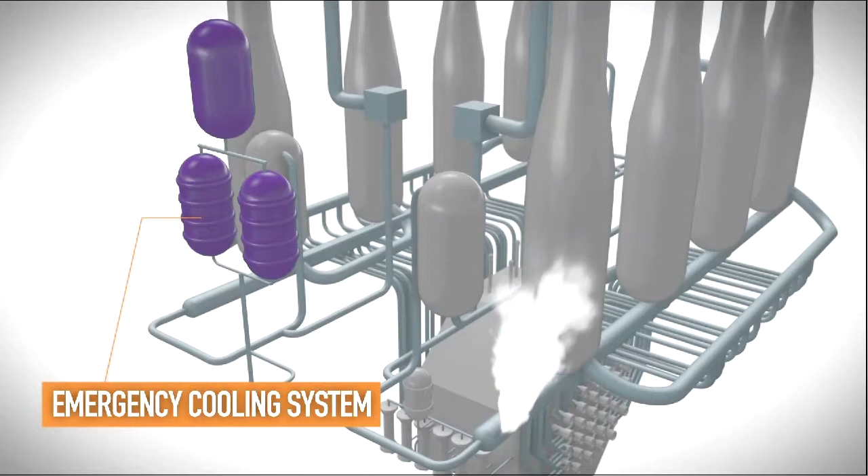The reactors themselves are enclosed by large concrete vaults that contain heat and radiation. The vaults are connected to a large vacuum building that is designed to relieve pressure and provide additional containment and cooling.

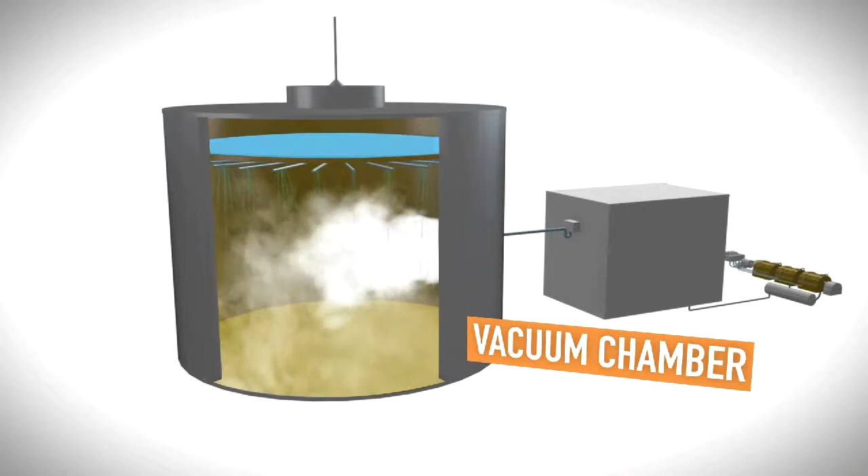So this is the way that plants have been designed traditionally, and they've been very safe over the years. But Fukushima brought upon a new concept in that the plants were self-contained. They had many levels of redundancy and backup power and so forth. Fukushima demonstrated that perhaps in some circumstances a situation could arise which would actually disable all of that because it's all in one place. And the event at Fukushima was a very significant event, not likely to happen on a very high frequency, but still some level of plausibility.

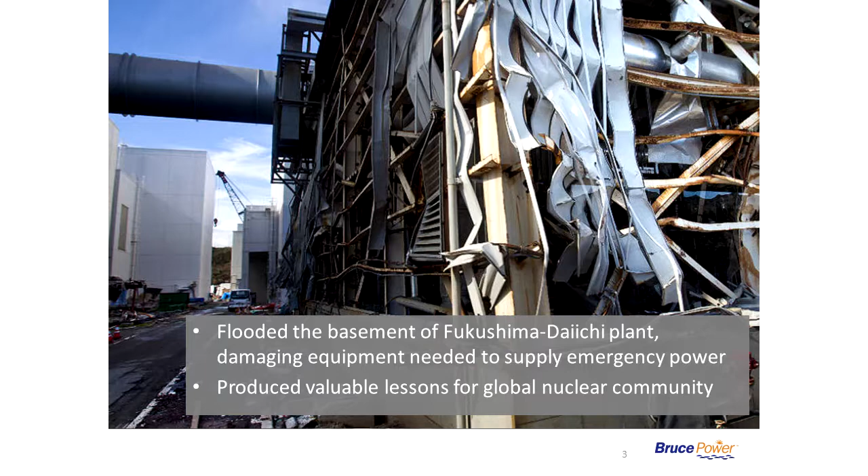So we looked at an enhanced emergency response approach that would allow us to provide an even broader level of diversity into our protective systems. We wanted to add some additional layers of defense, primarily aiming at the two things that a nuclear facility needs most of all, which is backup power and cooling water.

So emergency makeup water, we looked at in a number of different places. This just illustrates the changes we've been making and what they look like.

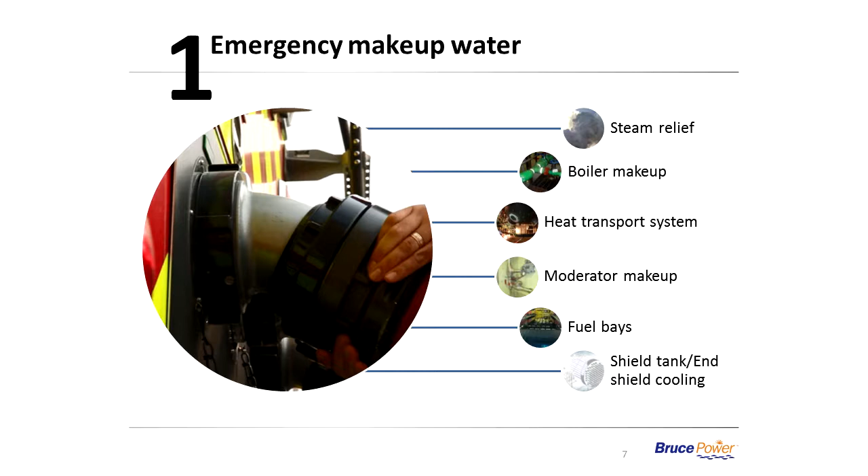If you look at the model of the reactor, which I have next, you'll see the reactor itself in the center, with the darker color representing the hot fluid from the reactor circulating through the steam generators on top. In our reactors there are 4 steam generators on each side, so a total of 8 per unit. That hot water from the reactor boils the water in the steam generator and produces steam.

In normal operating mode, that's the way it works. If you should lose a heat sink through the turbine, then the large relief valves on the top will lift in order to relieve the steam to atmosphere and cool and depressurize the heat transport system. In an emergency situation, this is exactly what you want to happen.

You don't require any pumps. The heat transport system will circulate naturally: cool water up at the top and the reactor at the bottom, and it'll cool, and the fluid will circulate with no pumps and no power.

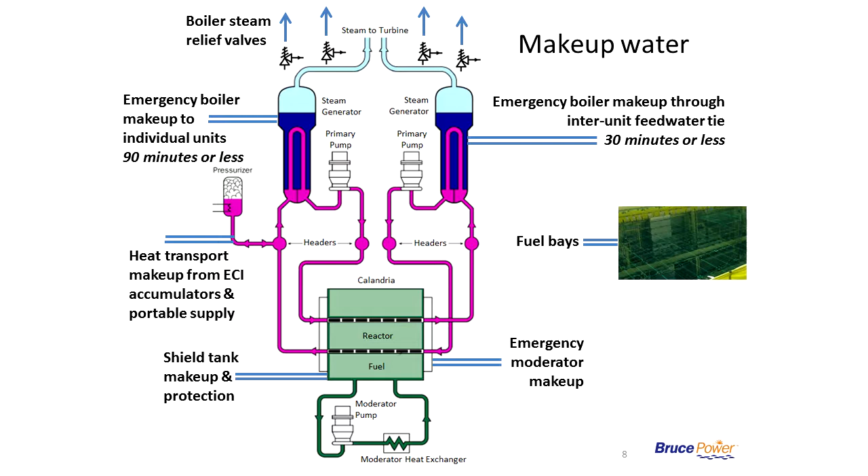To make this happen, you need a few things to be done, though. Number one, you need the boiler steam valves to be open so that there's somewhere for the water to go, so it steams off as steam. Now, there are different ways you can do this in the plant already. What we did was add another manual way of doing this through independent air tanks, so that we're sure we can open these valves and lock them open.

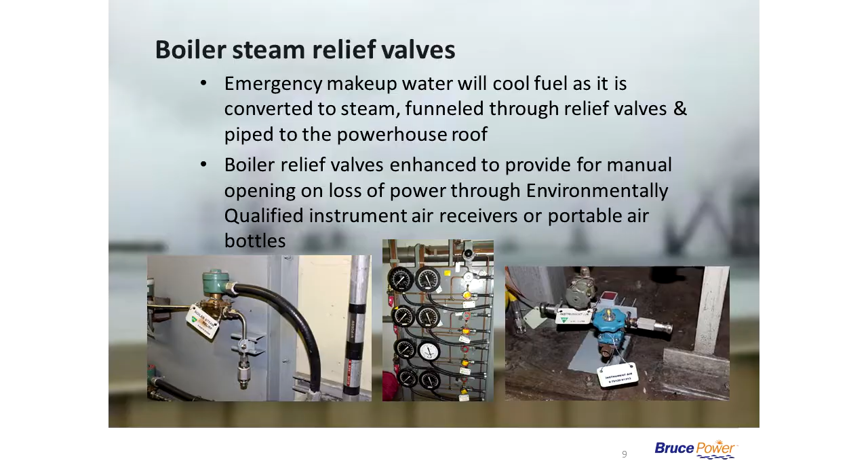Second thing you need is water in the steam generators. So the first path to water in the steam generators, through the inter-unit feedwater tie, is in place. It takes 30 minutes or less to hook this up for all 8 units, and that provides makeup water to the steam generators.

Not being satisfied with one, we have a second way of making up water to the steam generators, which can be done through each individual unit. That takes about 90 minutes to hook up to all 8 units. And the time frame we have here is about 6 hours or so to do this properly.

The next thing we need to do is make sure the heat transport system stays full of water. Obviously, in order for it to circulate and cool, it needs to be full. When you bring a reactor down from power and the heat transport fluid cools, it shrinks, and you have to add makeup water to keep it full.

The two Bruce reactor designs actually have a very unique feature, not seen on many reactors. We have what we call the heat transport accumulators. They're large tanks with a large amount of water stored in them, about 625,000 liters or so, pressurized by nitrogen, requiring no pumps. They're sitting on the system and will supply water to the reactor automatically when needed, and there's more than ample supply to keep the heat transport system full.

There are two gate valves which need to open in each unit. Those are supplied from all the emergency power sources on site, but we've also provided a hookup to the portable generators to open these valves. They can also be opened manually. So there are multiple ways we can make sure we get the feed water in.

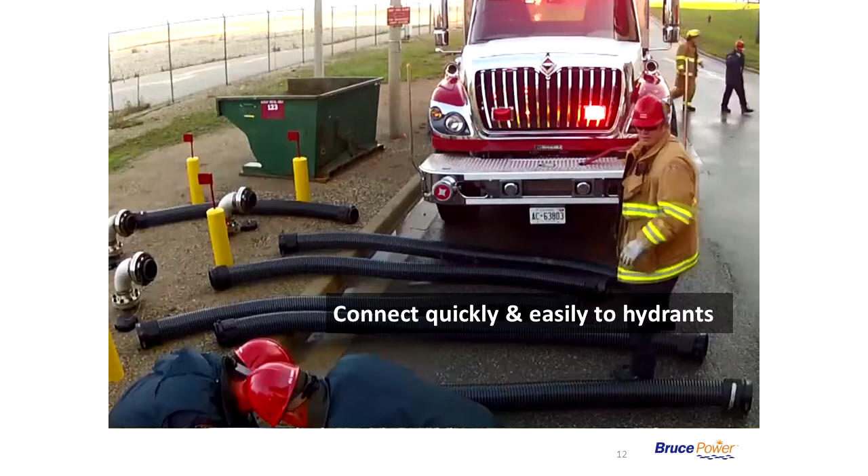These are the dry hydrants I talked about. They're actually just a pipe that drops down into the channel that flows out into the lake. This operates at lake level, so you're essentially drawing on the lake here. You hook them up to the suction side of the truck, quick and easy, and now you're ready to pump water out the other end.

This shows you how the connection point works from the truck. Connect on there, and another quick connect in the station to the inter-unit feedwater tie, and you're now ready to supply water to all the boilers in either station. That's the 30-minute hookup, that particular version.

Here's a few pictures now looking at the individual unit hookups. Remember I told you there are 2 ways — one I just showed you at the inter-unit feedwater tie. This is in the units, so there are some pictures here of how that happens. Again, you see the quick connects that are here — you just hook up to them and you can supply water.

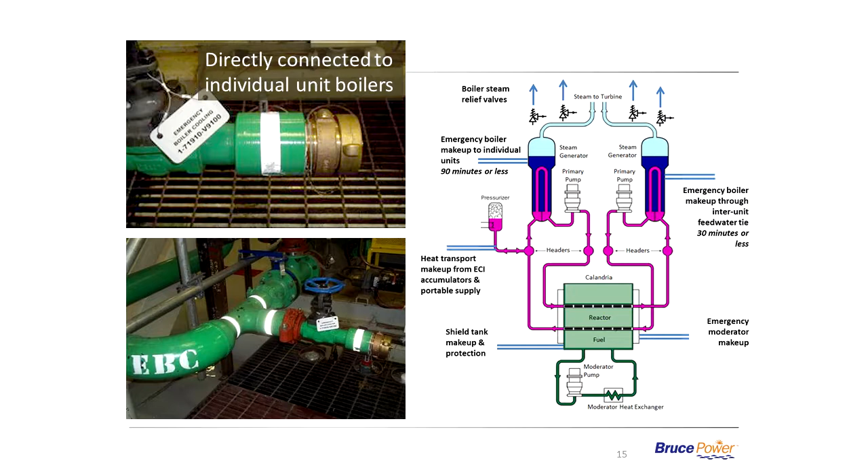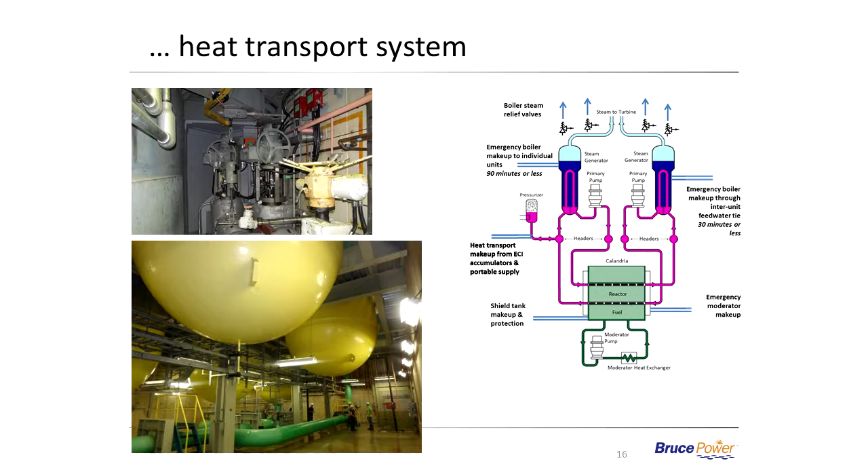This just shows you a picture of how it works. This is the moderator makeup, quick disconnects over at Bruce A on units 1 and 2, and these will be added to the remaining 6 units as well. The moderator makeup and the heat transport makeup to the quick disconnects, that begins happening with unit outages in 2016 - 3 of them in 2016, 3 in 2017, and the last 2 in 2018. That'll be the moderator and the heat transport makeup connections.

Meanwhile, we do have the SAMG process that we can use to hook up manually. The quick connects are meant to be physically diverse, provide a second way of doing it that's different from the first way, and provide a faster way. Although in truth, in the analysis, the moderator does not need to be done in a short period of time. You have time on the moderator system.

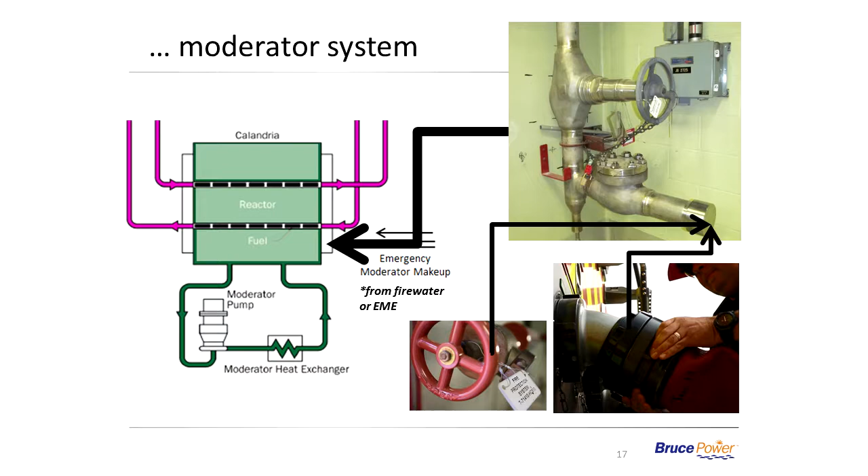Our program for the Fukushima event, really a simple concept. We're taking everyday pieces of emergency response equipment, such as fire trucks, and we've trained our staff to be able to deploy them in an unconventional method. So really, instead of fighting fire, we're making connections that are hard piping onto the stations themselves to provide cooling in a very timely fashion, to be able to ensure that the reactor cores remain cool and the fuel bays remain covered with water.

Talk a little bit about emergency power. Again, all the philosophy here is with quick, simple connections with material and equipment that the staff are used to using.

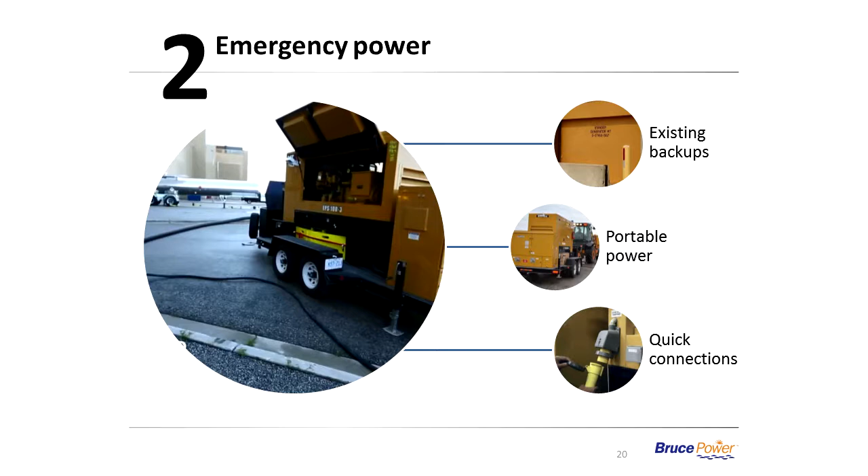So the first thing we should point out is we have a fair amount of redundancy in backup power. We have 4 standby generators and 2 emergency power generators at each station. Although the emergency power generators are called qualified power supply at Bruce A - different name, but same system. We have existing standby generators and emergency power generators that are part of the plant design.

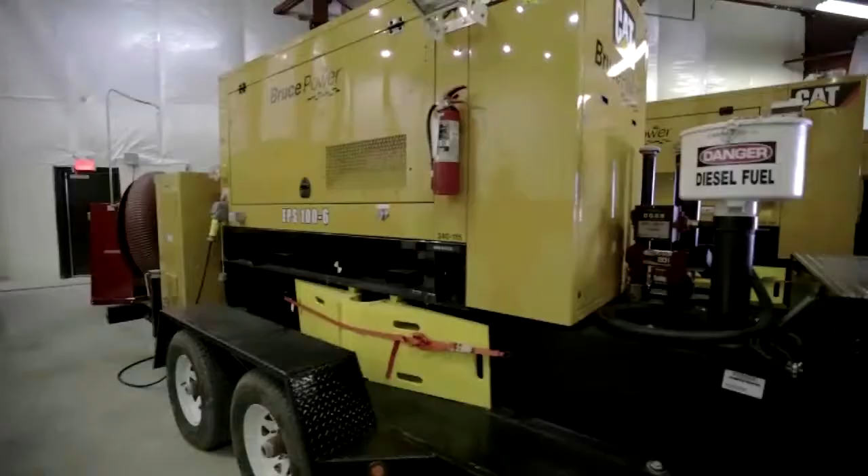There are also other backup power systems. We have diesel generators that back up our class 3, and then we have other diesel generators that back up our qualified power supply. We realized that if we lost all of our fuel tanks, we needed another backup. They're in place to make sure that if we have a loss of class 4 power or other power losses, that power still gets to the critical parts of the plant.

So you see here a few of the tractors and other things in our storage building that we use for this equipment.

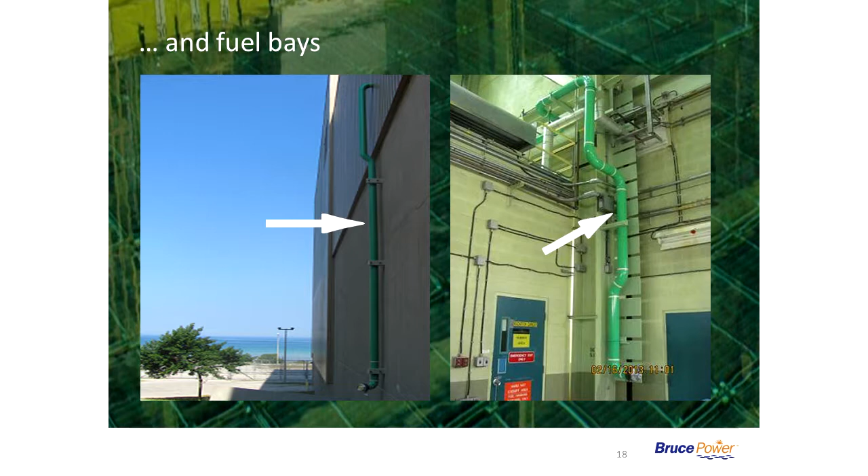So a few pictures to show you. This is the Bruce B side, the 100 kilowatt generator plus the hookup. This is one of the units - I'm not sure which one, I can't quite read the sign. These are all marked inside the station so you can't misread them, and the doors leading in from the outside are marked to lead the teams in the right door to do this so that they don't have to fumble around in an emergency.

Again, these are the 100 kilowatt generators. There's a redundant generator there. There's only 6 required, and we have an extra.

This is them being deployed. I think this was actually Huron Challenge.

This is at Bruce A side. The electrical system at Bruce A is a little different design, so we have a 400 kilowatt generator there, and this is it hooked up over at Bruce A.

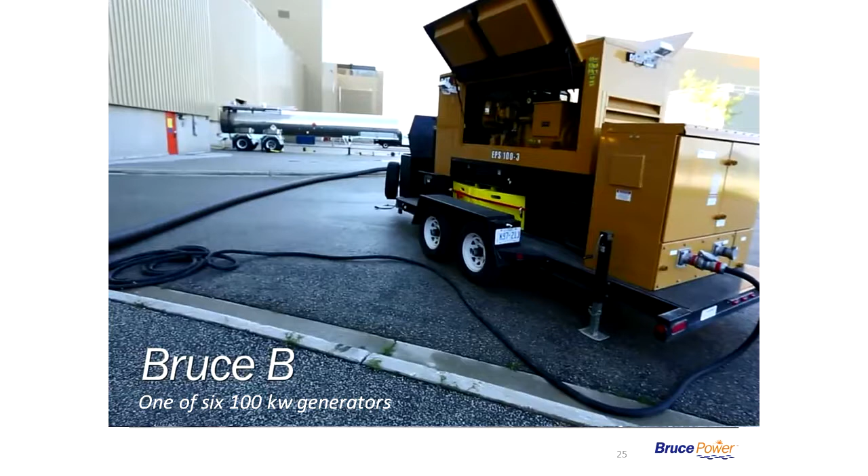This is back at Bruce B with one of them again. The quick connects from the generator itself, pretty straightforward. On the left here you see the Bruce A connection, and on the right you see the Bruce B connection. They're slightly different systems, so they had to have a slightly different hookup, but that was done on purpose.

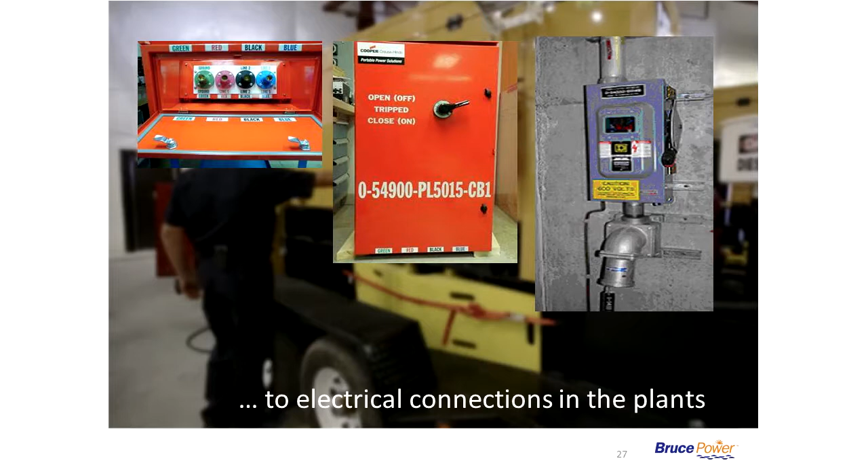The other thing, of course, is this was a lot of new equipment and new operating skills that hadn't existed exactly before. So we needed to do the task analysis, develop the training, and take people through the qualifications, inventing some new qualifications to do that, and that's been done. We're still looking at the systematic approach to training on the broader ERO skills, the guys in the emergency management centers and the like, and there's still some work ongoing. But all the emergency response personnel have been through this training and done it many times now.

We haven't forgotten about one of the key risks. There's some danger sometimes when you get looking at the exotic risks, the tornadoes and the big events, that you forget about the day-to-day things that are problematic. The one that's probably the biggest risk for us, and I think the biggest risk for any building or any house, is actually fire. So we haven't forgotten about that. We've been doing a lot of work on this as well, both because it's a risk day to day, and of course in a catastrophe when things go wrong and tornadoes go through, sometimes things catch fire.

So we've done a fair amount of work in this regard. In fact, we were just this morning doing the grand opening of the fire training facility, and these are a couple of the pictures. This isn't really the plant that's burning here—these are mock-ups in the fire training facility. It's a 5-story building, and as you can see, a nice big turbine generator set that people take quite joy in lighting on fire. This is a cable tray, a very standard thing in the plant, and here's a heat transport pump. So you get an idea—we have 11 design basis fires in the plant, and they're all represented here, along with a number of external fires like vehicles and other things we might have to fight, as well as some pans we can use to train on foam as well.

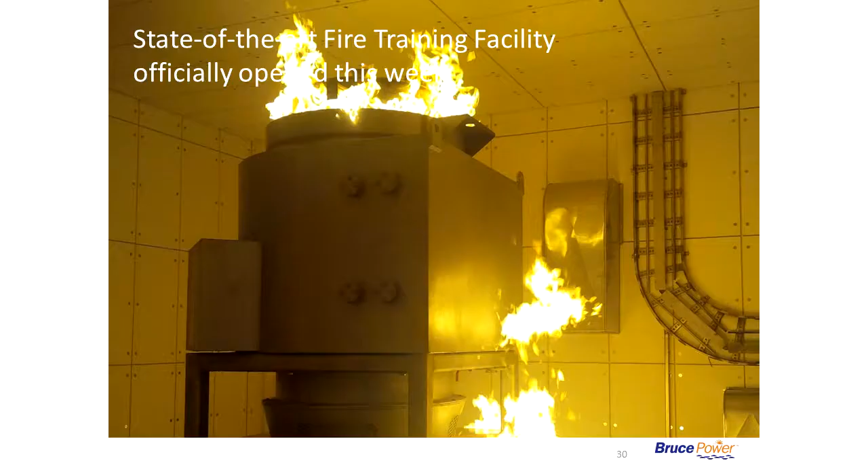So having all the equipment is great, and making sure we know how to use it is great. We also need to know how to work together and coordinate the activity. Huron Challenge was a big exercise in that regard to test it out, and next year we will do another major exercise to work through this.

I've got a couple of little clips here from Huron Challenge, I think, which...

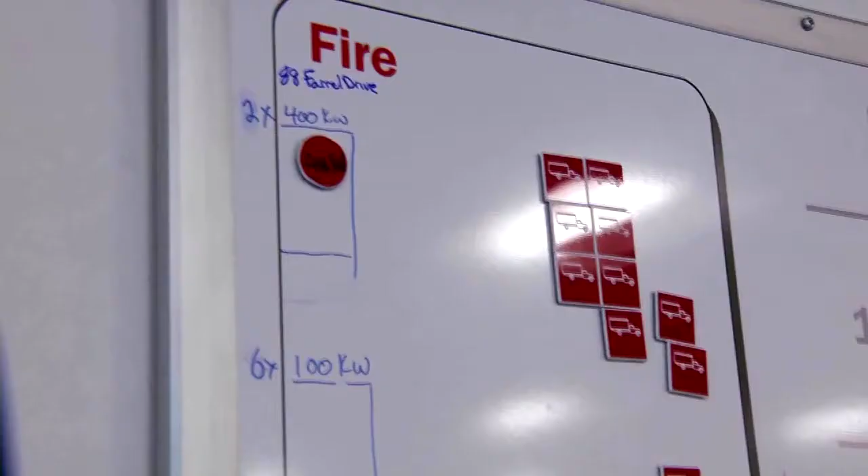This is Drill Ops Chief. Emergency Services is presently en route with the required equipment to B. They are clearing the route to A. They have all the resources they need at this time. Clearing efforts underway to A still? Correct, and they're moving emergency support equipment from here—en route, from 88 Farrell to GSB. Correct. The first challenge is a blocked road from tornado damage en route to Bruce A.

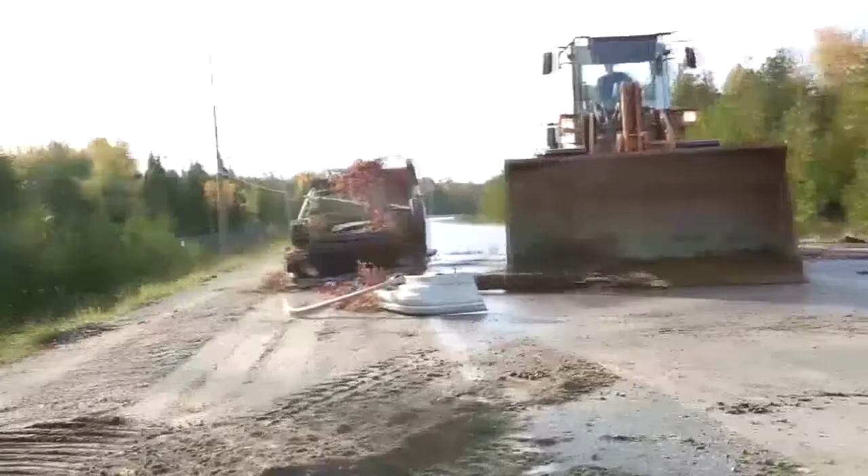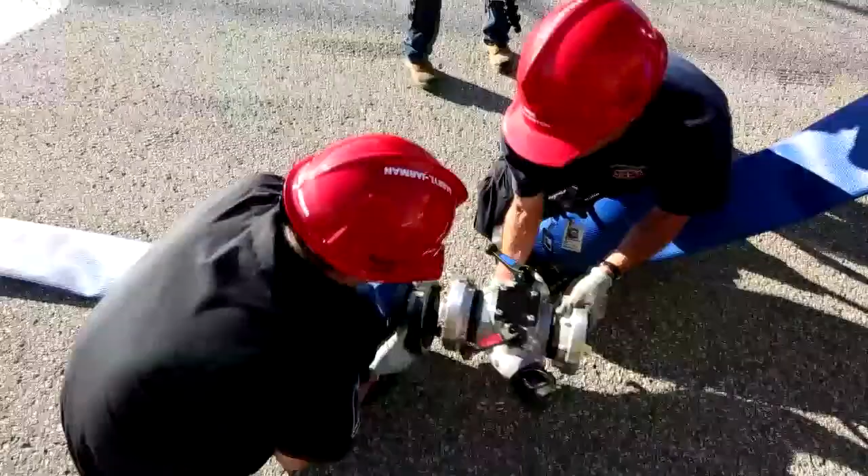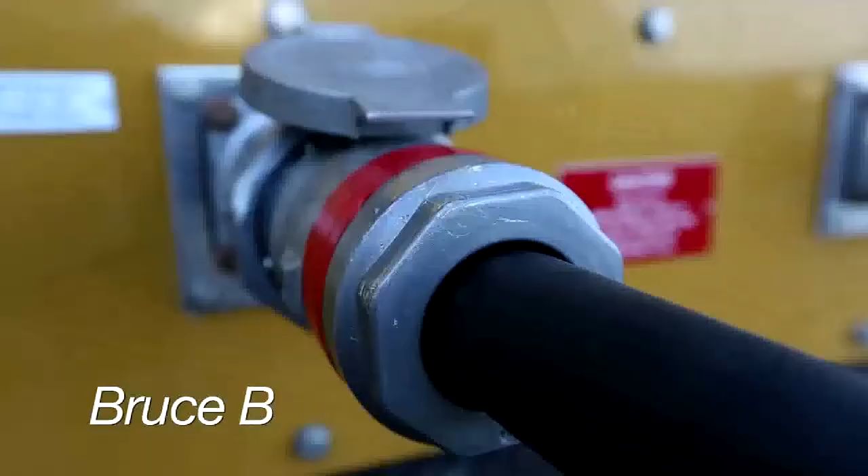Bruce Power first responders are being trained on payloaders and know how to remove debris. The payloader makes room for the fire trucks to get to the stations, which can now pass through and get to the station to cool the fuel. Arriving at Bruce A, the team must attach hose from the dry hydrants to the trucks to pull water from the lake and pump it onto the fuel. These trucks can pull up to 3,000 gallons of water per minute, more than double the ability of standard fire trucks. They must then attach hoses to the fire trucks to deliver water to the stations. A tractor and hose trailer are used to lay hundreds of feet of hose to supply each station's 4 reactors with cool water. The water provided to each reactor keeps the fuel cool, and the risk of overheating is eliminated. Simultaneously, they must carry emergency backup generators by tractor. Bruce A has one 400 kilowatt generator, and 6 100 kilowatt generators go to Bruce B. These generators run for 36 to 48 hours without having to refuel.

While the team sets up the fire trucks and generators, those working inside the plant prepare to receive the cool water and power. And of course, during Huron Challenge, the other side is what's going on out in the community and how you support that and make sure the equipment is there. These are a few pictures: Canadian Red Cross, Health Canada copter doing radiation surveys over the site, the OPP doing rescue up in Port Elgin, and some students who were happy enough to play casualty for us and test out the hospital facilities.

They seem to enjoy this sort of thing.

The Emergency Workers Center in the bottom right was set up in Kincardine but actually moved to Port Elgin in the middle of the drill to test out its ability to do that. The field hospital was set up in the parking lot of the Southampton Hospital as part of the drill, along with one of the houses that was destroyed in Port Elgin as part of the overall scenario.

In truth, they actually destroyed this house. It was one that was being taken down, so it was a real demolition. They mounted a considerable rescue to get people out of the house who were trapped in it. It worked out, and it was fortunate that the developer was willing to let us use his prop in the exercise. To do that, we had to set up a fairly large control area, so we did that in our large auditorium on site, just to control and send the messages out.

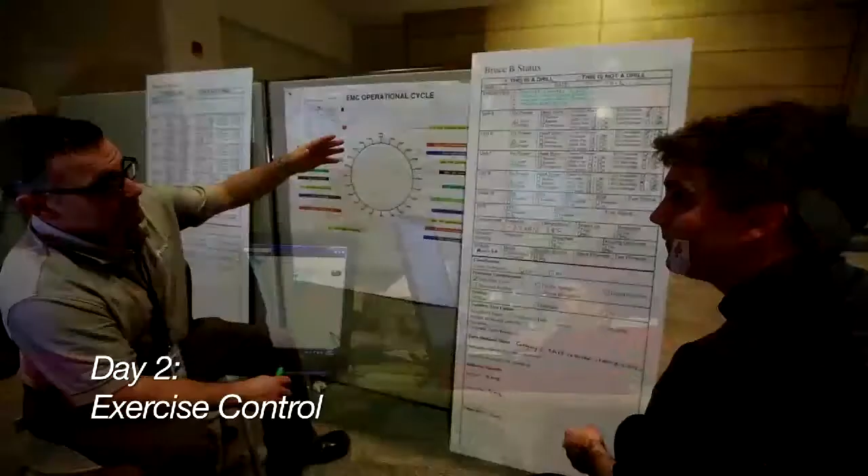Also at the Bruce Power site, Exercise Control, or XCON, continued to set up challenges for the 71 participating organizations in the 4 counties of Grey, Bruce, Huron, and Wellington. XCON is made up of staff from each participating organization and Emergency Management Ontario. These small teams of people exemplify months of planning for each exercise theme.

The teams at the various emergency operations centers react to situations called injects, provided to them by the XCON team. Huron Challenge was one of the largest emergency drills carried out in Ontario.

The last thing we needed to test was the durability of the trucks and the pumpers themselves, so we put them through a 24-hour run. Back at Bruce B, the fire trucks continue to pump water well into the night. The trucks have refueled and must continue to pump water for 24 hours to prove they are self-sufficient.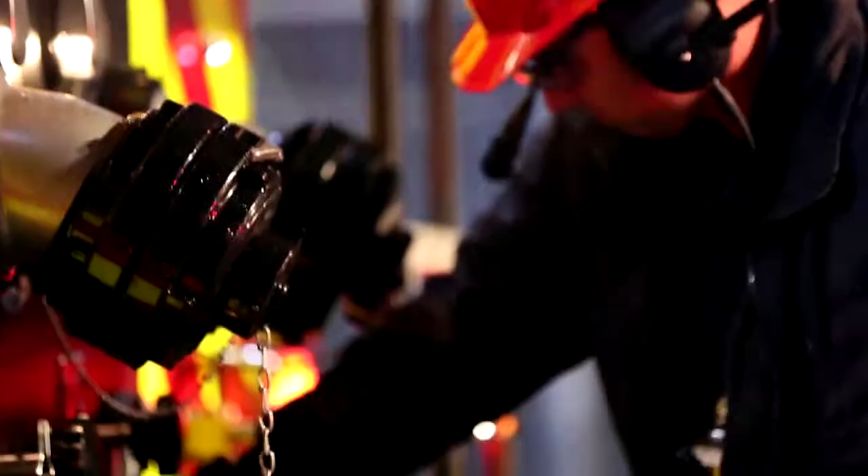Having proven self-sufficiency for over 24 hours, the following morning, the fire trucks are allowed to be shut off.

Site 1, this is Bruce B Pumpers. Confirmed successful refueling through the night. Trucks have run successful for 24 hours. Request we shut down, over.

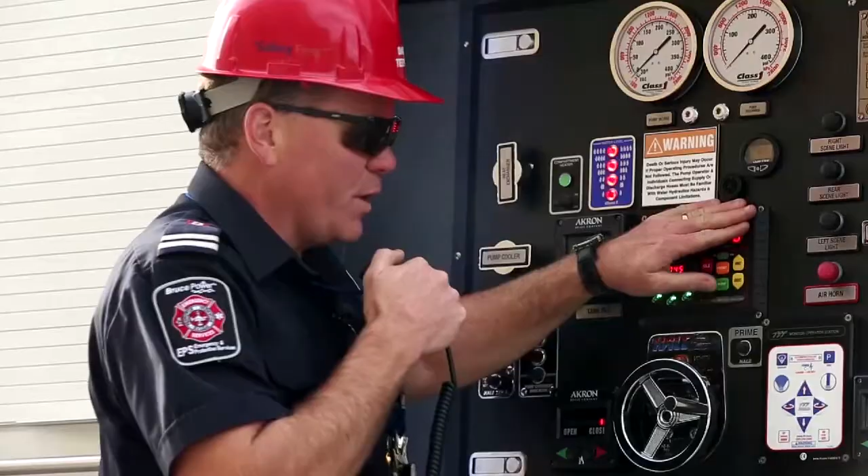We used our portable pumper to fuel those trucks while they're operating. You have to fuel them about every 5 hours when they're running full tilt like that. So the portable truck comes around, fills them up while they're running without interruption.

And of course, the next step is, what about off-site? Should the emergency get to the point where there's an off-site release, how do you deal with that?

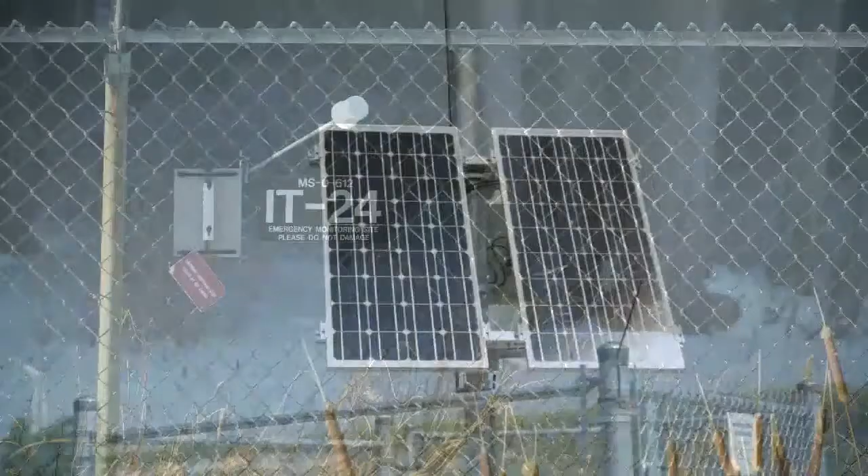We've developed a new off-site monitoring system out to 10 kilometers, which will automatically detect any radiation released. It'll operate 24/7 whether there's an event on or not. This will provide very accurate and detailed tracking of any radiation that might be released in an emergency, thereby allowing the government to easily move people out of the way.

The remote monitoring system at Bruce Power consists of 44 spectrometers or radiation detectors. The system itself is fully redundant in the sense that the detectors are battery operated and have trickle backup solar panel charge to sustain operation. The data from the detectors is sent through the cellular network, which provides us the capability to have near real-time remote monitoring around the Bruce Power site.

Where we retrieve the data from the detectors is within our emergency management center, and the emergency management center itself is also fully redundant in terms of backup power and backup communication systems. So as you see behind me, we have a remote monitor with very sensitive detectors. In fact, they're so sensitive they'll actually pick up on everyday common household items.

In terms of expanding our public notification system, we've looked at not only use of sirens, but also capabilities such as FM radio connection to the public alerting system within the province of Ontario. We have different normal or high priority messages, and I'll just type in, this is a test, so I'll hit send now, and that is sent.

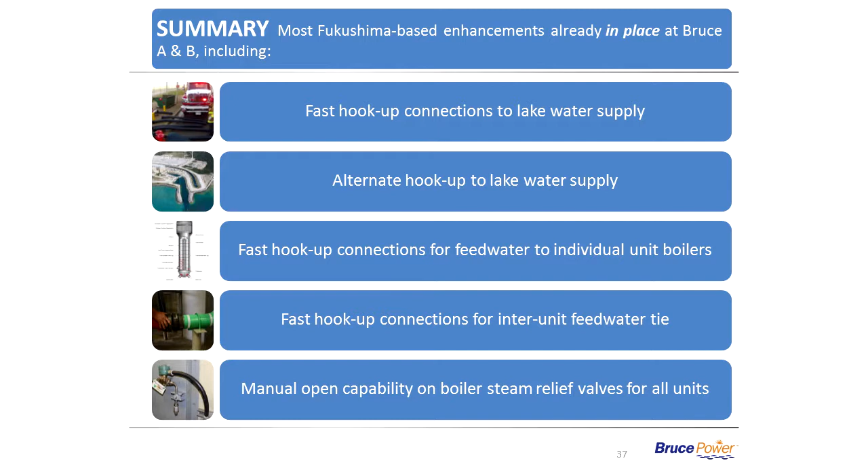Fast hook up to the lake water, alternate hook up to the lake water supply, fast hook feed water to individual and unit boilers, the inter-unit feed water tie, and manual opening on the boiler steam and relief valves on all units.

Fast hookup water connections to the primary fuel bay and to the secondary fuel bays. Fast hookup water connections to the moderator on Unit 1-2.

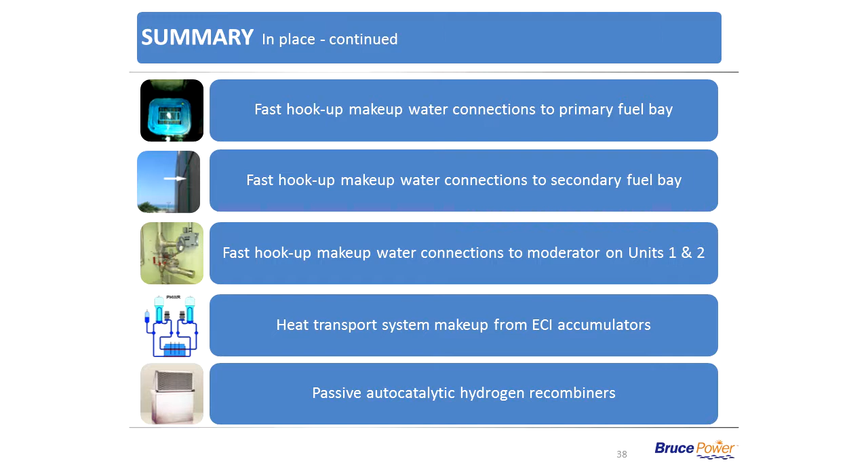Heat transport makeup from ECI accumulators and passive autocatalytic hydrogen recombiners, all done and in place. Severe accident management method to make up water to the heat transport system, and a severe accident management method to make up water to the moderator. This basically means that we manually hook it up rather than using a quick disconnect to do it.

Fast hook up electrical connections for each unit and the common systems, as well as the EFADS. Fast hook up electrical connections for containment emergency filtered air discharge system.

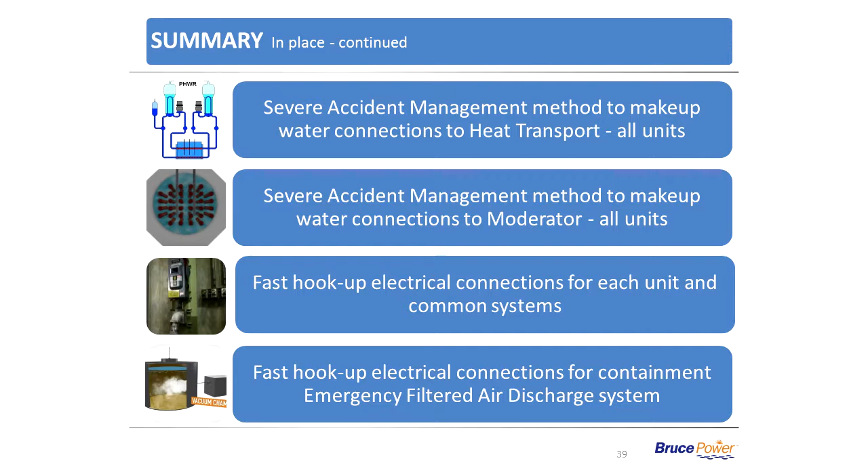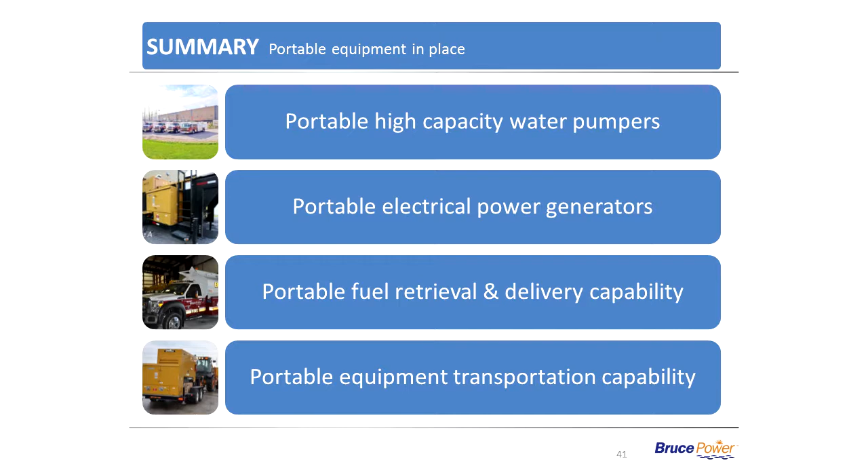Portable high capacity water pumpers, 5 of those. 12 portable power generators, portable fuel retrieval and delivery truck, portable equipment transportation capability, again all in place. Heavy duty equipment for route clearing, portable equipment storage building, firefighting equipment, and a maintenance and testing program for all that equipment, all in place as of today.

Off-site support in place. We've got a communication system that works very well, can talk to people virtually anytime. The radiation monitors out to 10 kilometers are in place, and we have deployable radiation monitors that we can deploy beyond that should we need to.

Potassium iodide tablets, we actually just started to get the delivery today. They were a little slow, so this is them in the new package, and we can let you have a look at those after a bit if you like. And this is a booklet. It's also on the Be Prepared Huron Bruce Gray website now, with all the different emergencies in it, including nuclear.

The FM alert, the radios are here, the system is ready to go. We opted to do the distribution after we do the KI pills so as not to confuse people, so we'll be doing that very shortly. And that'll actually be a fairly broad distribution because we don't see the FM alert as particularly a nuclear capability. It's a capability that the communities can use for emergencies in general. It just includes nuclear.

Safety assessments. Our chief engineer is going to talk here in a minute about the safety assessments and where we've got to, but we've included some pretty extreme external events in here. Despite that we broadened the events and broadened the requirements considerably, the addition of the EME, as you might expect, the emergency mitigating equipment as a whole new layer of defense, has made a significant improvement on the overall outcome of those PSA results.

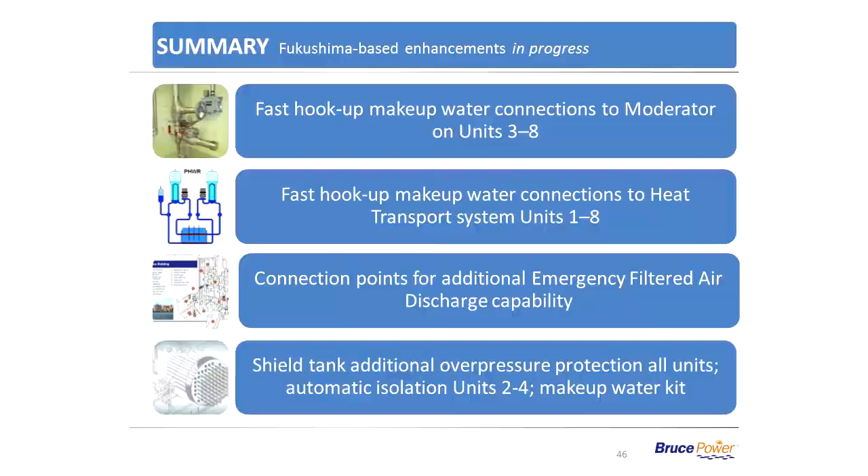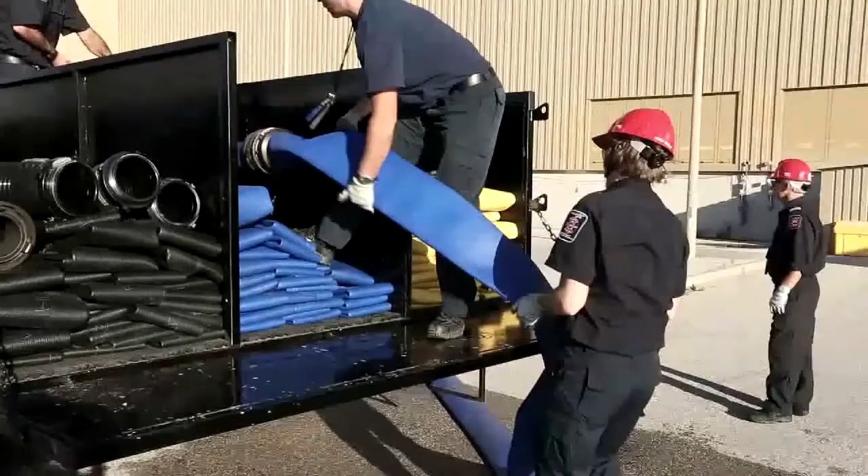We feel that we've taken the Fukushima events very seriously, applying the lessons in a much broader sense, looking not just at those kinds of events but any event that might occur. We think our crews are well trained and on standby 24/7, so we feel we have the capability to deal with virtually any emergency. We invite you to drop by our visitor center for a closer look at the plant and facilities, and I think you'll walk away with confidence that the place is well looked after and we're well prepared.

That was a little long, but I thought it important given the central place Fukushima has taken in the last few years, and the amount of effort and time put into it, to go through it in some detail and talk about what's fully in place and what's yet to be done. So that's it for that presentation. I'll now move over to Mr. Newman to talk about PSA.

Okay, thank you Frank. Good evening, for the record, Gary Newman. I'm going to be speaking this evening about assessing and understanding risk. We'll be doing so at a fairly high level—obviously we could spend a number of days discussing this topic were time available.

For the purpose of this Part 2 Commission hearing, we felt it was important to provide more detail on all the work completed to evaluate both internal and external sources of risk, which in turn demonstrates that Bruce Power is compliant with current CNSC regulations.

At a high level, I plan to speak to the following aspects: the historic perspective based upon relevant regulation, including establishing and sustaining a credible design, and improving the design through risk-informed enhancements. We'll then discuss the evolution and updates to our safety assessments, followed by a brief discussion on new tools, which Mr. Saunders has already touched on some of, the ongoing plant and response planning enhancements, also already touched on by Mr. Saunders, and then a brief summary.

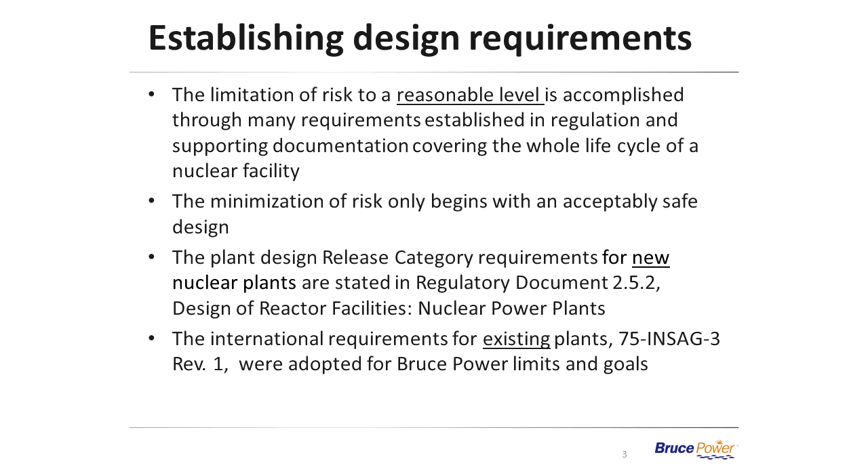The design requirements were established in the original siting guide, which identified the deterministic design and operating requirements and sets the single and dual failure dose limits.

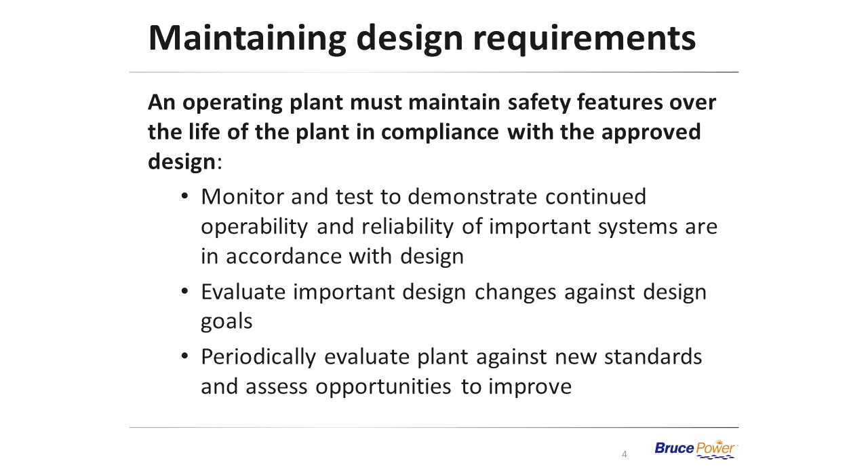From a safety report viewpoint, probabilistic assessments were added to the original deterministic tool set beginning in the 1990s. At that time, goals and limits were set for severe core damage, large and severe release, as well as public health criteria. These early PSAs embraced release thresholds approximately 5 times larger than current values, resulting in the need to produce more accurate predictions within current assessments.

These historic PSA assessments were completed after the plants were in operation for many years, rather than as part of the design activity. Modeling activities focused on comparing with the new expectations, so in general only enough work was completed to confirm that the limit was achieved. This meant that many supporting systems were not modeled but simply assumed to not be available as a result of the event, which adds considerable conservatism. These assessments focused on internal plant events, including loss of off-site power, the latter being a single external event that was considered.

As part of the safety assessment evolution, a greater focus on external events was established by CNSC Standard 294 in 2005.

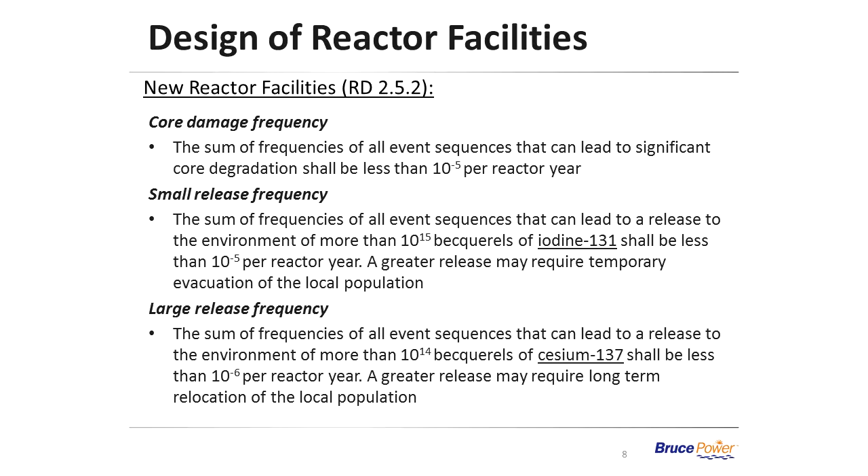These definitions were developed based on internal plant events, and there remains a discussion about how to properly integrate external and internal events and properly calculate an accurate aggregated release frequency. However, for the purposes of today's discussion, we have simply added them, although we know this is a conservative treatment.

As an example of the continuous improvement process, work has been completed to enhance the Bruce A and B safety reports through updated PSAs, which consider fire, seismic, high winds, and flooding under both operating and shutdown conditions. This was completed against the backdrop of updated PSA release categories.

The following lists the safety improvements that have been installed in the plants and were included in the internal plant event assessments. So for example, the emergency makeup water from portable equipment directly into the boilers, as already described by Mr. Saunders. I do not plan to go through the list. However, most of these improvements have been fully installed and credited within the PSAs.

Fast makeup water to the heat transport system is currently ensured by additional emergency power to the Emergency Core Injection accumulator tanks.

Another committed makeup path for emergency mitigation equipment utilizes severe accident management instructions can also be established. Installation of a third path through quick connect fittings is in progress.

Makeup water to the moderator system from emergency mitigation equipment utilizing severe accident management instructions can also be established. Installation of another path through quick connect fittings is in place for units 1 and 2 and in progress for units 3 to 8 as already described.

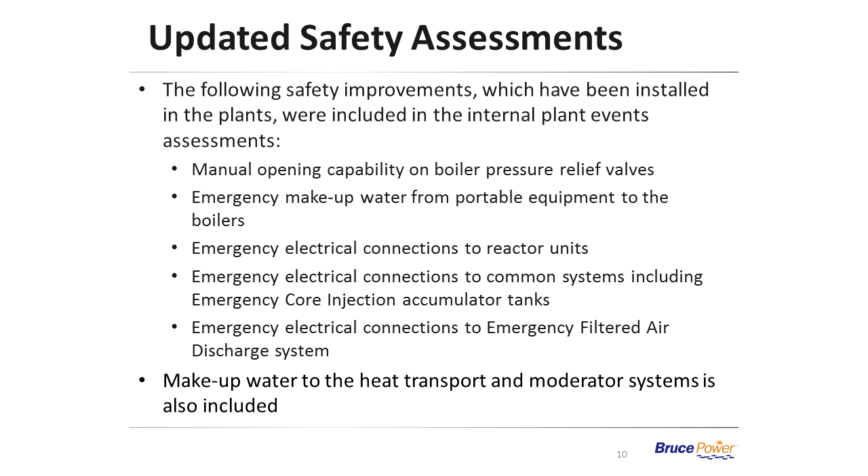I should note there was one additional bullet that may not be on your slide, and there's a makeup water to the heat transport and moderator systems, which we added afterwards.

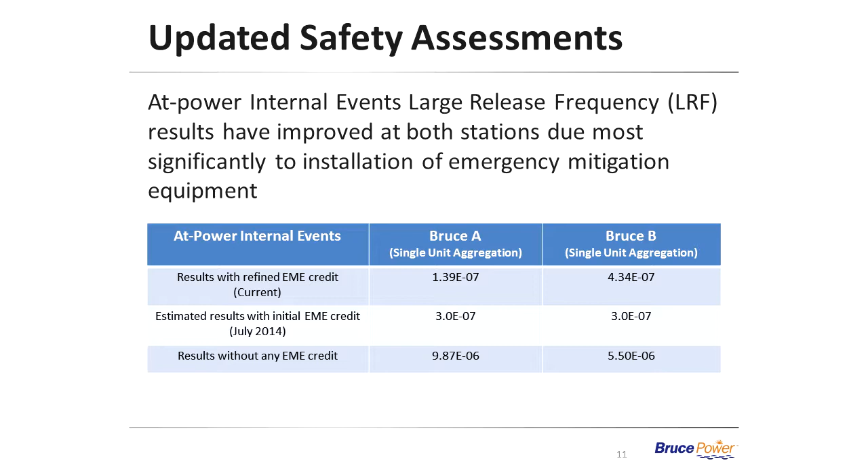Also, the estimated values for EME were provided in the July submission to the CNSC and more precisely calculated in the November license application update. The estimates proved to be pretty accurate.

Some safety improvements that were committed and currently in progress, as already described by Mr. Saunders, are credited in the station aggregation for large release frequencies and external events, for example, enhancements to containment robustness for multi-unit events. Although still a very conservative calculation, it demonstrates the progress made through the Fukushima enhancements and the value of the work still in progress.

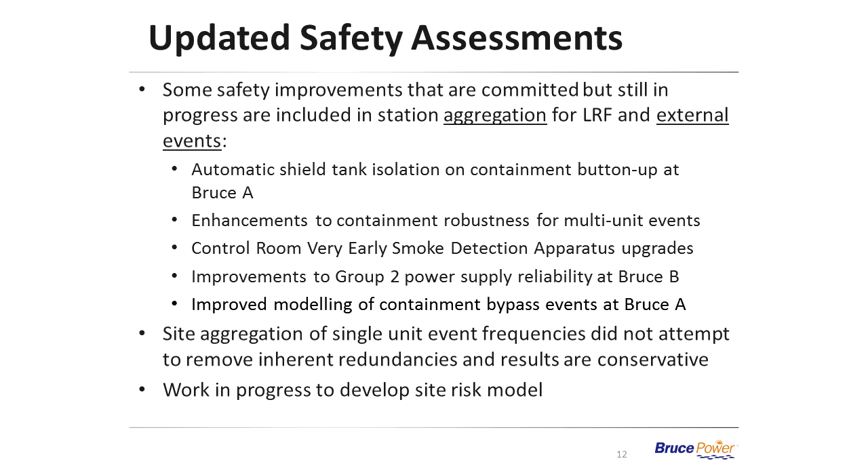It is also important to note that site aggregation of single unit event frequencies did not attempt to remove the inherent redundancies, and results are considered to be conservative. Lastly, industry-driven further work is underway to develop a site-based risk model, which we believe is currently leading the industry in this area of development.

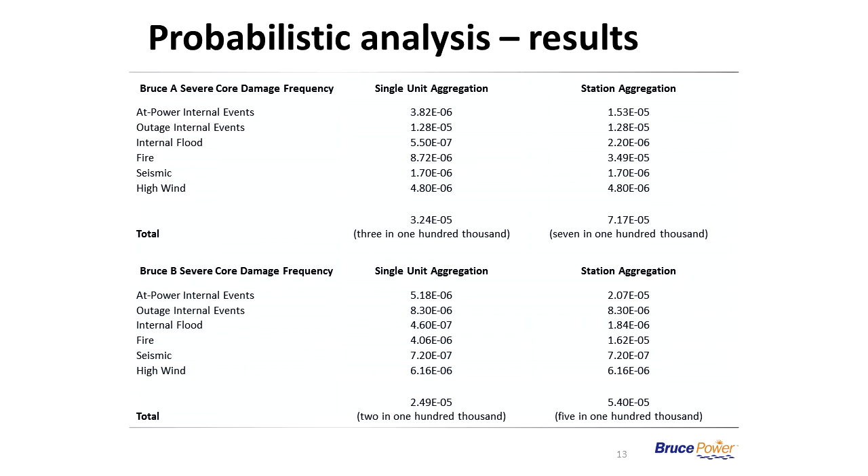On the next slide, we have results for the severe core damage. This table provides results for each station, for the combination of internal and external events, for single unit aggregation results in column 2, as well as station aggregate results in column 3. All of these results meet the requirements of the current criteria.

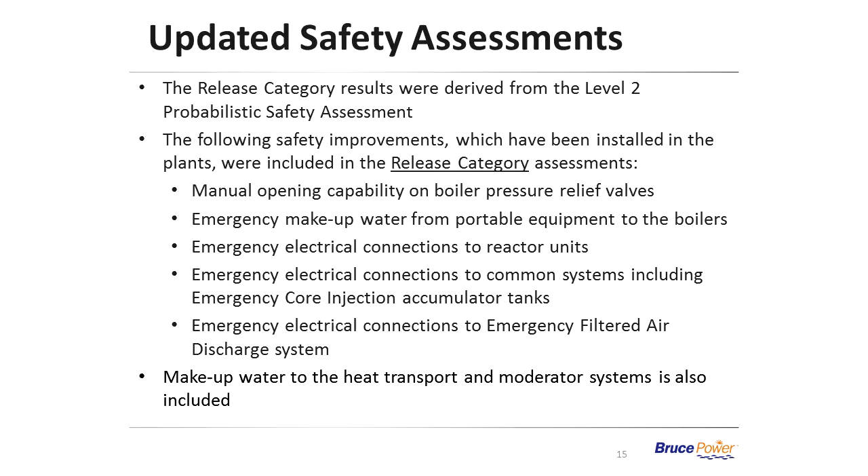Just as I described for the severe core damage frequency calculations, we have similarly credited installed EME for release category assessments, and you can see examples of the noted improvements in the following table. For example, the design basis events at both stations, one can see the frequency improvement when crediting EME, comparing the third and fourth columns. These release frequencies, while still very unlikely, are the most probable.

The releases would occur as a result of venting of containment through the emergency filtered air discharge system. This type of venting maintains containment pressure low and prevents release of isotopes that can result in longer-term contamination. These are the type of events where shelter in place may be a viable option, and as Mr. Saunders has indicated, the use of potassium iodide may be directed.

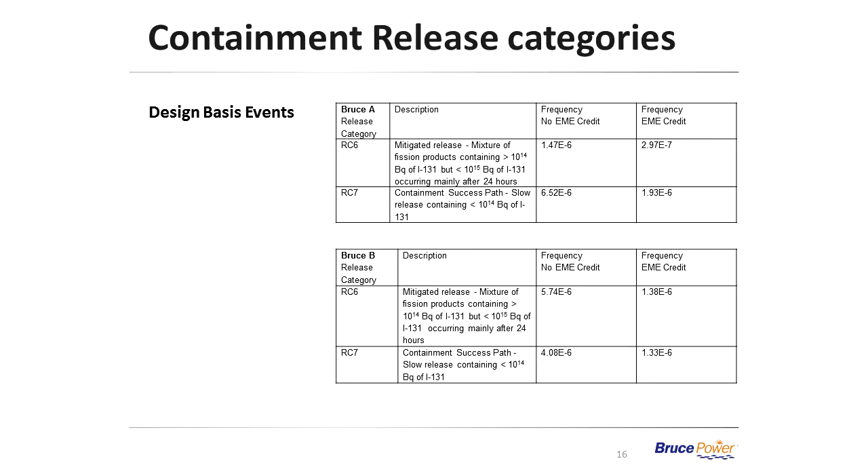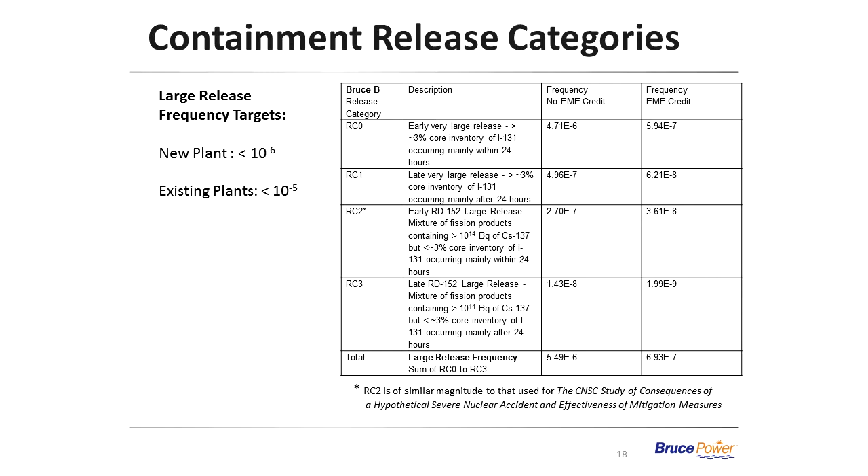And on the next slide, the same again for Bruce B. Decrease in frequency when EME is credited, well below the 10 to the minus 6 cutoff, normally associated with incredible events.

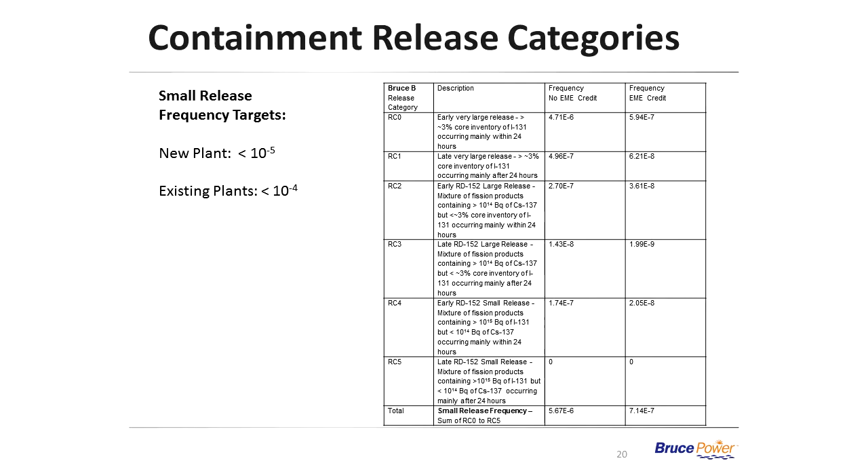And on the next slide again, the same outcome for Bruce B. And again, as I already noted, the term small release by definition includes both small and large releases, and might more accurately be called all releases or total releases.

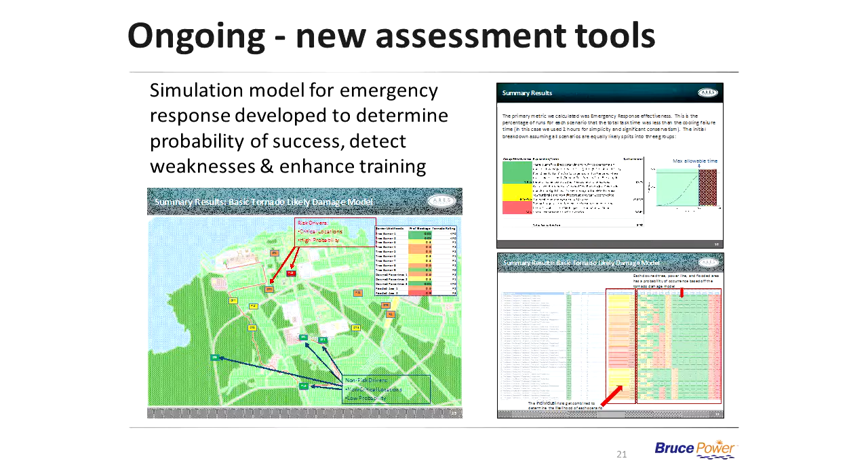As I noted earlier in the presentation, there are a number of in-flight projects that are being implemented to add further enhancements to the stations. These are all on track as described by Mr. Saunders, as per schedule and as communicated through formal correspondence with the CNSC.

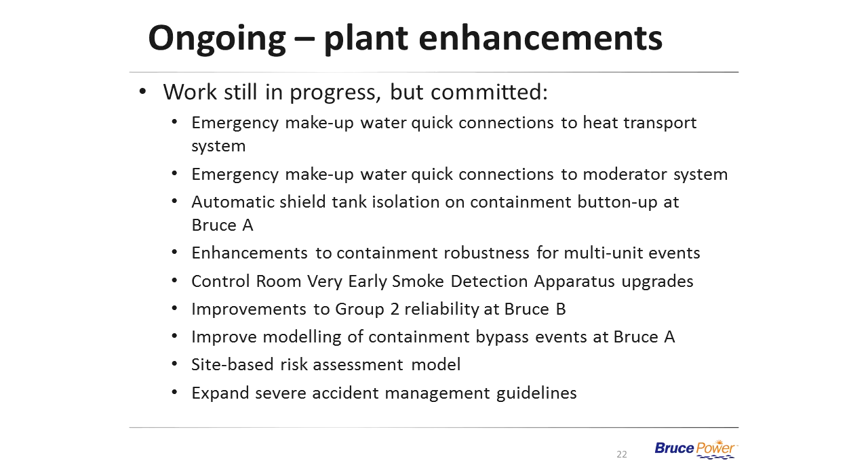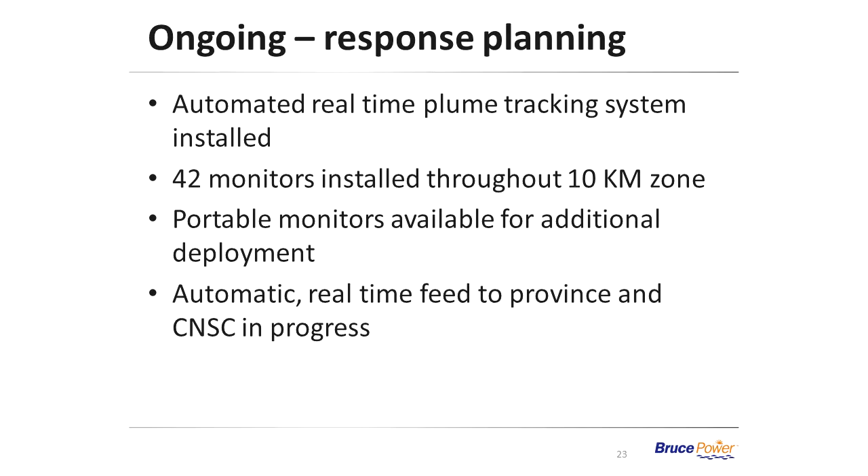Current ongoing works supporting response planning, including, as already mentioned, 42 installed monitors within a 10-kilometer zone, an automated real-time plume tracking system supported by portable monitors available for additional deployment, with implementation of automatic real-time feed to both the province and the CNSC organizations. It is important to note that this is not just a paper exercise, but that the information gained from these assessments is being utilized to enhance both on and off-site emergency response capability.

In addition, work is underway to develop enhanced predictive plume modeling at the industry, provincial, and regulatory levels, and this modeling capability will support assessment of a suite of accident scenarios. This is consistent with the practice by the US NRC.

Working with the province and the municipalities to improve public alerting capabilities for all emergencies through technologies such as FM alert, which provides further defense in depth, and this is due to begin this spring. In addition, we are working with Pelmorex and communication companies to establish a cellular text alert system. Again, we are building additional barriers to ensure continuous improvements.

An additional element of our response planning is the distribution of potassium iodide to a radius of approximately 10 kilometers. This measure is just underway with the necessary instructions along with website and public information sessions. Once complete, we will sustain the program through a periodic refresher program. Lastly, distribution centers will be set from 10 to 50 kilometers to allow those access.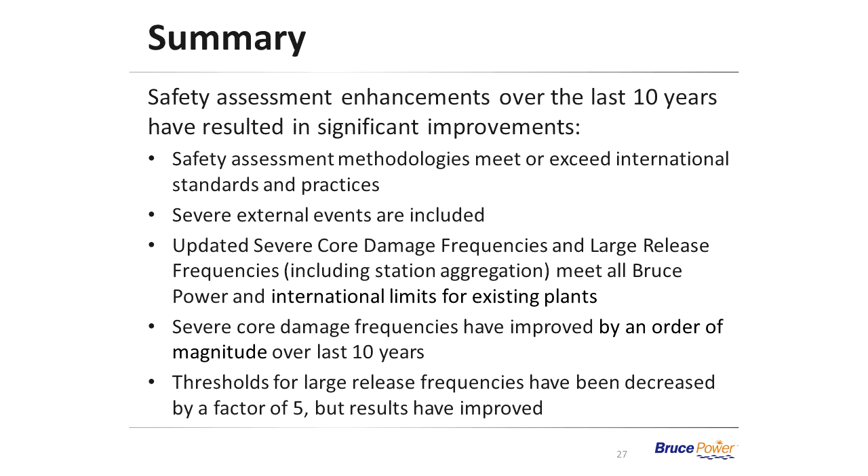In summary, Bruce Power and the industry have been diligent over the operating life of our plants to review plant design against modern standards, including safety assessment methodologies, and to apply this knowledge in real plant enhancements, as seen in the prior presentation tonight. The continuous improvement in plant performance that has resulted from this effort demonstrates the superior approach in the Canadian regulatory environment, which encourages ongoing improvements.

The Fukushima enhancements have been effective at reducing overall risk. Based on current practice of analyzing large release frequency against in-plant events, including multi-unit events, Bruce Power not only meets international standards for releases for existing plants, but for the most part would meet requirements for new plants. The work already committed for Bruce A is expected to bring it in line with these numbers. As aggregation of individual results is considered both in Canada and internationally, changes will occur in some methodologies, and Bruce Power will continue to participate and support this effort.

We have considered the release category results of the PSA work as well as the CNSC study on hypothetical severe nuclear accident and effectiveness of mitigation measures in relation to off-site emergency planning, and find that the current planning zones are adequate, but that the reliance on local infrastructure for monitoring and communication in a regional disaster scenario need to be reduced.

Finally, it should be noted that the calculations to complete these assessments were rigorous, with the final results encompassing nearly 40,000 pages. Large amounts of time could be spent debating all the possible perturbations, but the work was completed in accordance with approved methodology and at a high level has been summarized in the preceding series of slides. Thank you.

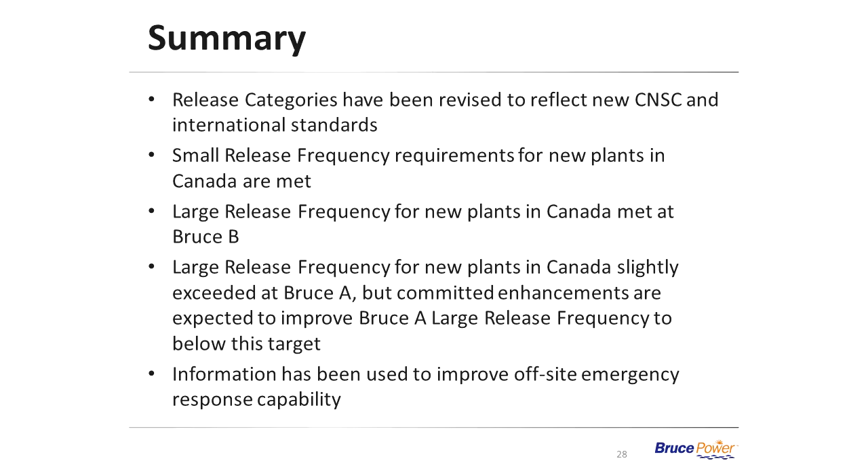So, Frank Saunders again for the record. One short presentation left from our side. This goes to some questions we had from the commissioners at the last part one hearing around the monitoring points we used to assess public dose. So this is just a short presentation to show you where those various monitoring points are and what they look like.

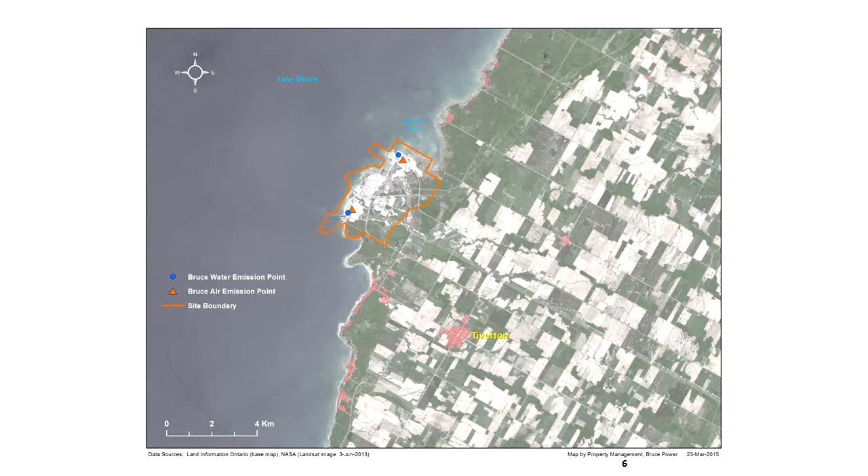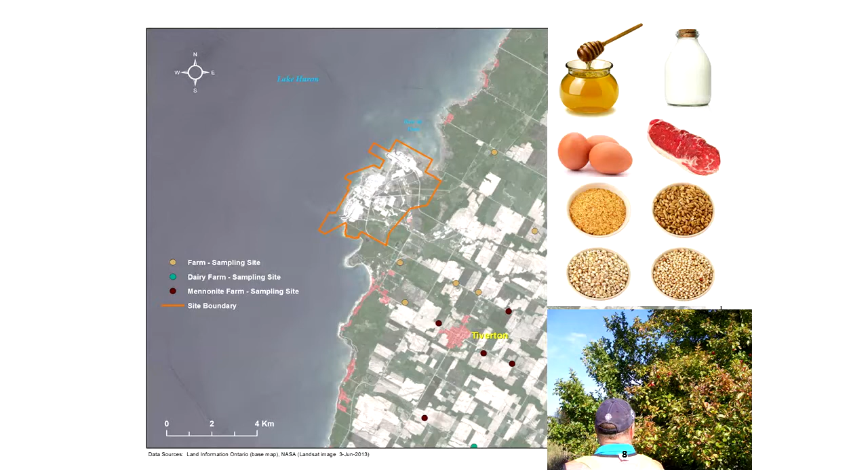Here are a number of the farm sites we use to sample, and we're sampling pretty much what you'd expect, anything grown, eaten, or produced on the farm. We ask people to voluntarily participate, and many of them do, supplying us with these materials so we can check them.

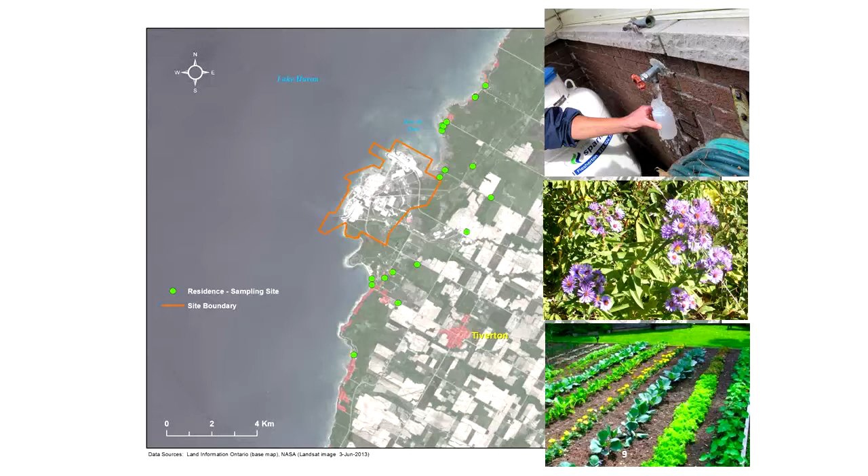These are a number of residential sampling sites where people live. We sample things like water, flowers, and vegetables if people are growing them handy, and we use this as part of our input into the dose calculations. There's a fair number of sites we use. Again, this is all voluntary on people's part, not something we control, but we ask for volunteers, and people have been very good about it.

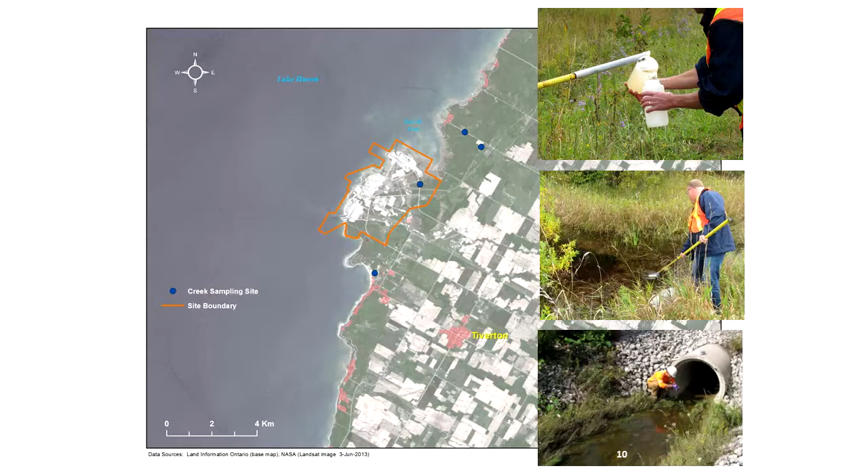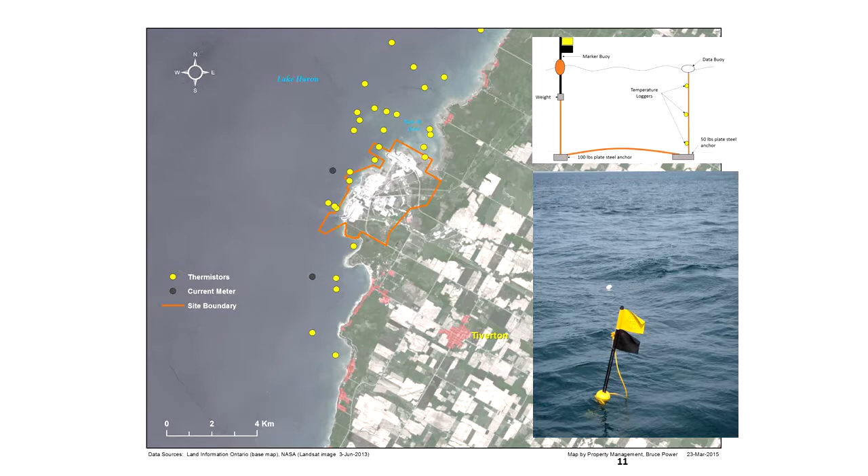We've had studies underway to turn this, much like the off-site monitors, into a radio beacon that sends the signal up so we can get it in real time. Right now they're just recorders, so we're working on that. We had a test one that worked okay. We just need to look at how to do a production version. It has to be reasonably cost-effective, because like I said, we go through a fair number of them.

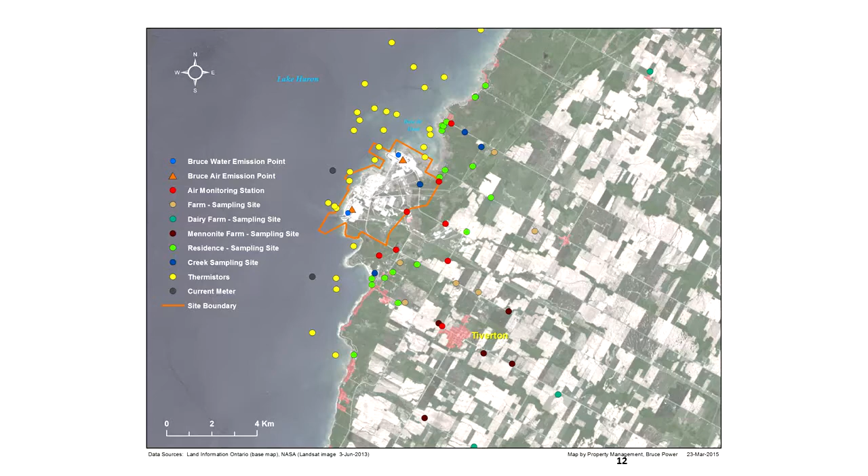This kind of puts it all together for you, showing the number of points we look at as part of our dose assessment. For water treatment plants, we look at Southampton and the Kincardine water treatment plants and measure the water intake there.

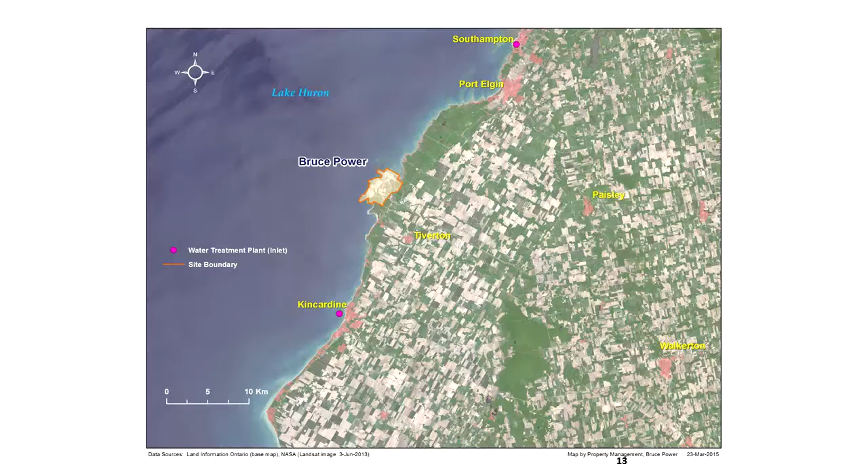These are all the wells that exist around the site. Some are deep wells, some shallow, some industrial, some residential. We don't sample them all, but we sample a number and keep a log of them so that if we should ever have an event or release that we needed to warn people about, we know where the wells are.

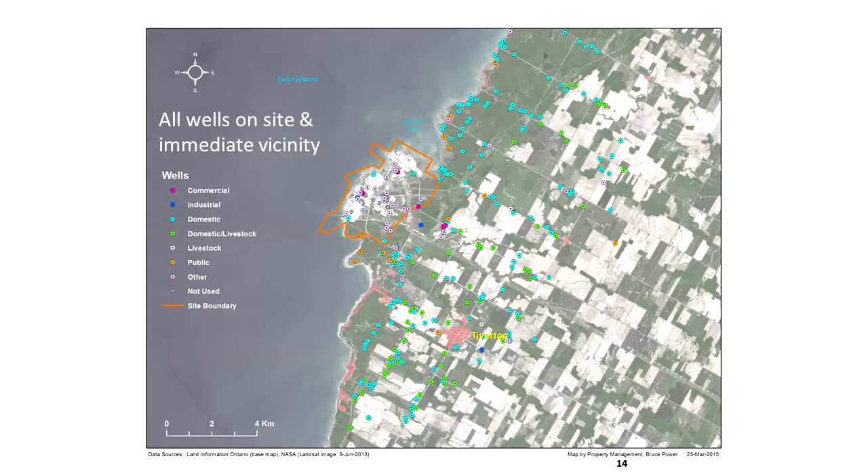On site, the one last question we had was around well number 4 at Bruce A and Bruce B, because they were showing slightly higher levels of tritium. You can see in this picture the BB4 and BA4 wells. It's a multi-level well, basically just a dry well not actually used for anything—it's a sample well that can be sampled at various elevations. So when you see samples labeled BA4 1, 2, 3, those are just different levels in the well that's sampled. They're on the lake side because we're looking to see whether there's any transmission moving from the plant towards the lake, and they're there to tell us what goes on.

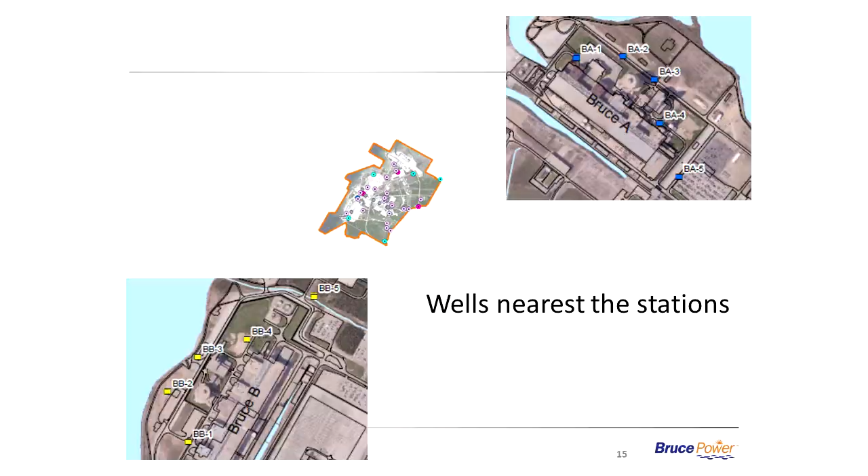And that concludes the presentations.

Thank you. In summary, members of the Commission, I think we tried our best here to provide explanatory information on some of the points that were of interest at the day 1 hearings. As I mentioned earlier, the intention was to provide a bit more explanation of some of the points that either Commission members raised or we felt were appropriate given the tone and nature of some of the interventions.